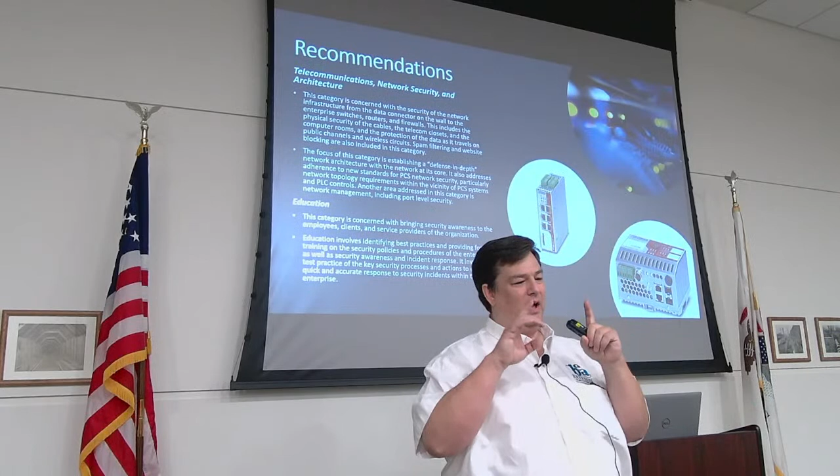That's why it's super important, because if the line was encrypted, okay, which by the way it's still not yet, I'm working with Brian on that. If the line was encrypted for the water plant, and it was done correctly, it doesn't matter that somebody down in City Hall had got malware, because the system can't get through, because you're firewalled and you're encrypted and everything. That's one of the reasons why.

Education, that's one of the reasons you're here. It's because you're going to get education on this stuff. Well, this is just overview stuff. So this is the kind of things that we try to educate you guys on, and this is why they bring people in to be able to educate on this stuff. Super important that we get it done.

Managing your cybersecurity. These are the top listings of the fields where people are trying to hack, because they know they have a very high incident of impact. If they get that system screwed up and messing around with, then they can impact a huge amount of people. Water and wastewater is on that list. We've heard of healthcare, it's almost common now that you're hearing about a hospital getting ransomware.

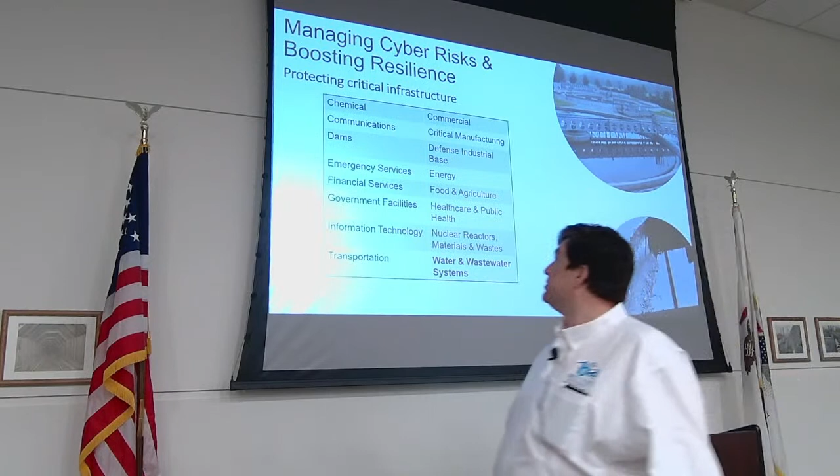Now, your chemicals, your dams, emergency services, your government facilities have all been hit by ransomware. You guys are on the list, because over the last decade, it's ramped up from a couple here and there to now it's a constant thing.

I have one customer that has somebody that keeps pinging their firewall from Korea, North Korea, not South Korea. It keeps being pinged by them, and they're looking for holes. I block them, they change their IP. I block them, they change their IP. But it happens over and over and over.

So how do we do this? Well, there's tools. You can do a cybersecurity risk and boosting resilience assessment, okay. Here's one from the Cybersecurity and Infrastructure Security Agency. What they have is a framework for improving critical infrastructure and cybersecurity. It's a voluntary risk assessment approach for managing your system. You address the broad security needs of those critical areas, but it's not one size fits all. Your system is going to be different from your system, and your system is going to be different from yours. So you tailor it for what you're doing, but you never cap yourself so that you can't expand and manage it and move as you need to.

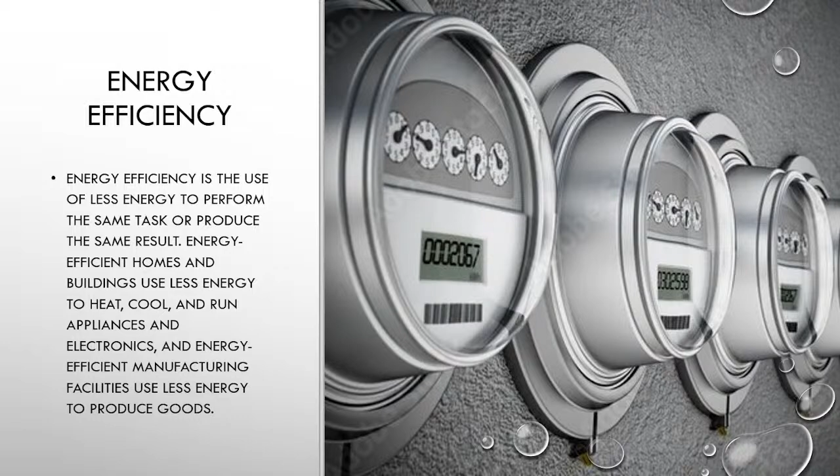Energy efficiency is pretty straightforward - trying to save money where we can on utility costs, which of course are going up. Is everybody here on Ameren? So everybody saw their bill. How many people actually see the bills for their facility? Anybody here actually see them? Okay, so you saw the spike.

Everybody at home saw their spike too. Just so you know, that was on the supply side - that wasn't really Ameren, they were just passing it along. Ameren just went to the ICC and applied for an 83 million dollar rate increase to go into effect in January. The ICC will rule on that, and Ameren will probably get a portion of it. So what I've been hearing is you can expect a similar increase in January.

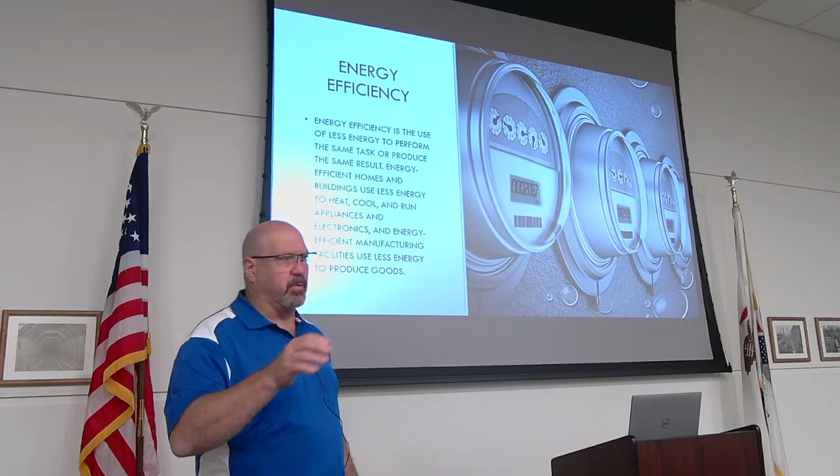So on your February bills, you're going to see another bump. There's no long-term scenario where it goes down, quite frankly. One of the things we're hearing is with the grid and MISO, which covers the Midwest, there are some issues as a lot of coal plants come offline - a lot of them were here, so getting generation from point A to point B wasn't as big an issue as it is now. Don't expect any of those things to turn around - you can expect rates to continue to increase.

Why do we do an assessment? It's pretty straightforward - we're going to try to figure out how to save money on utilities. Costs of everything are going up - chemicals, electricity, everything we do. We keep seeing huge increases.

So what we'll do is walk through your facility - have somebody come through with me and show me how you do this, what the controls are, what the pumping is. I take a lot of photos - my memory's not as good as it used to be. We can do some thermal imaging to try to find issues on occasion. I'll also try to get all your electrical information - that's 480 volt and 50 horse motor over here, and this stuff's all 240, that kind of thing.

I try to look up incentives - Ameren does have some incentive programs. They have a lot of rules with them, but they do have some pretty effective programs if you're willing to go down that road. And then, of course, we'll provide recommendations.

So I need at least one copy of your utility bill - we like to do it for a year. One place I worked with had given me a bill from February of last year, and when I did the assessment the other day, I said that's not going to work because your rates now are substantially different than they were then.

I also need a little bit of your time to walk around with me, so you can escort me and show me what's going on, let me get some data. And I need your knowledge of the conditions, because I'm not going to know anything about your plant. You'll walk me through your process - this VFD runs this motor, we run it 12 hours a day, and here's why, that kind of thing.

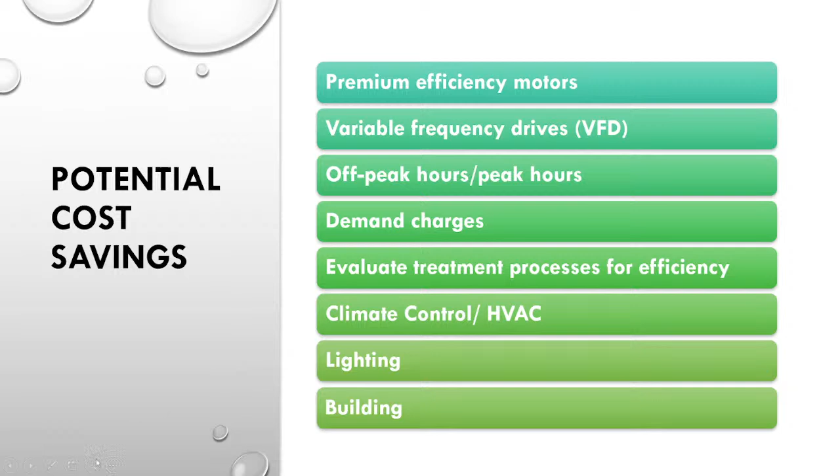EPA's got some estimates on how much power is generated just for it. Aeration and pumping, and wastewater aeration is a real big one for a lot of the smaller plants. Aeration and pumping both. Drinking water, by all means, pumps are the big thing. But bottom line, you're talking about a third of your operational costs just for energy.

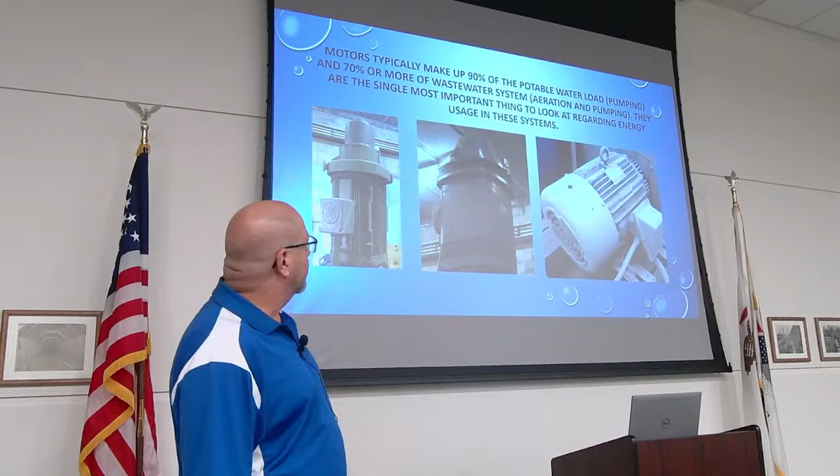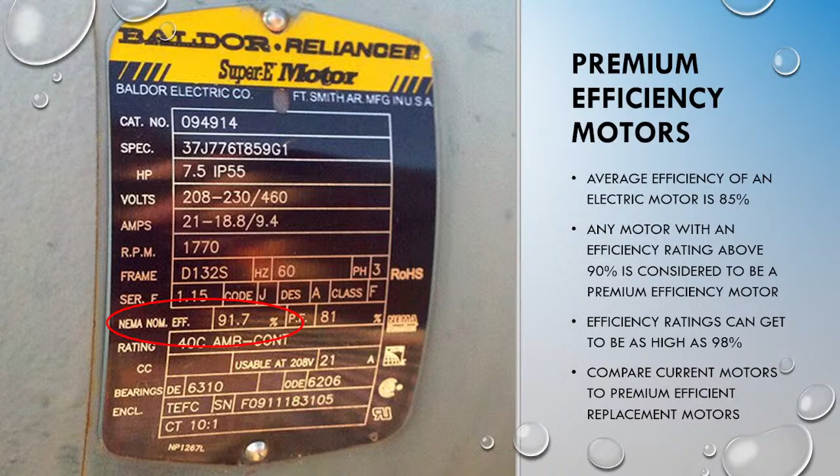When you're looking at pumping load, we're looking at motors, whether it's a 15 horse, 50 horse, 100 horse, no matter what, we're going to look at the efficiency on them. I've seen some motors that I think were older than I am, still there and still running, pretty impressive. Anyway, the average efficiency of an electric motor is 85. They are changing, and depending on the size of the motor, the premium efficiency is different. They can get as high as 98, but that's in bigger motors. You're not going to see that in a 7.5 or 15 horse motor.

As you can see, there's kind of what it is. So with smaller motors, the best you're going to get is like 91.7. But as you get up to 100 horse, you'll hit 95, and when you get bigger, you hit even higher efficiency. With electrical rates going up, it makes a significant difference.

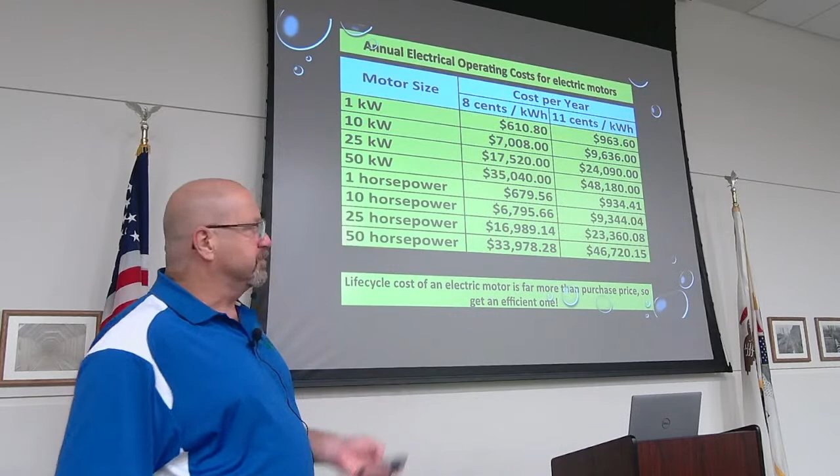This kind of shows you the rates going from 8 cents over to 11 cents. If you look at it like a 10 horse motor, you went from 6,800 to 9,300. This is 24/7, 365, so this motor's running all year long. But just running up really quick on one motor, that's the increase you saw.

A little bit here, a little bit there. This is all going to add up really fast when you start putting motor after motor.

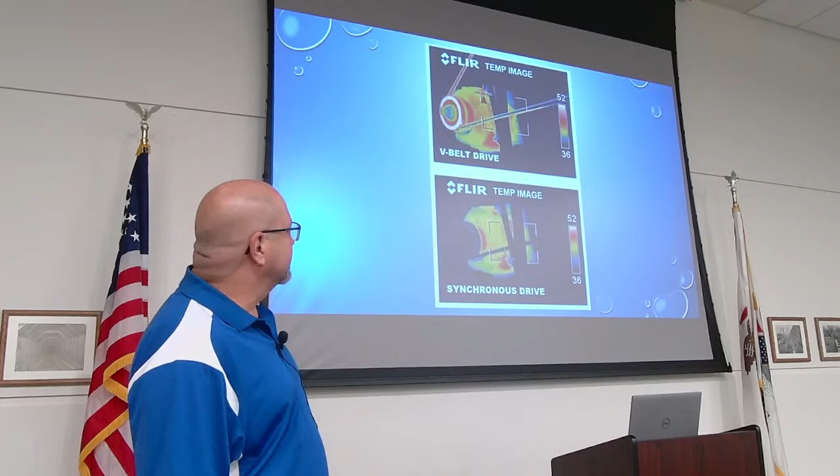We do use a FLIR once in a while on some stuff. This is one of the things that kind of surprised me - once again not my slide, I steal everything off the internet. This was just belt slippage. I wish they would have shot their range a little better, because that's obviously above 52. Basically it was pretty cold where it was at, and that belt was slipping, so they were just losing energy over the belt slip.

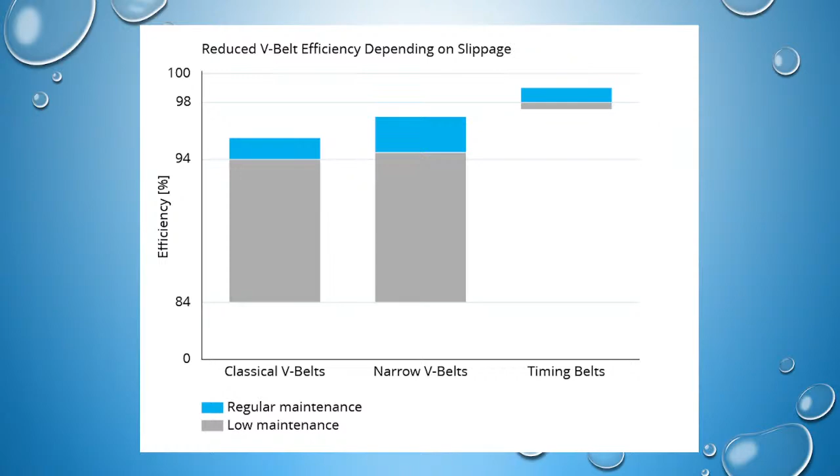Which doesn't sound like a lot, not a big deal, but one of the things they're pushing pretty hard now is timing belts - the cog belts, like a timing belt on a car. They slip a lot less. I never really liked the narrow V-belts, but apparently they're a little more efficient, I always went with the standard. But timing belts, I looked this up a couple places and they all pretty much said the same thing: if you're putting a belt drive on a blower or a compressor or something like that, go with timing belts and you'll save a couple percent efficiency. And if you've got something running 12 hours a day, you're going to make a little bit of money on it.

Once again, what we're looking at is trying to get everything we can from what we're spending. We don't want to waste electricity. I don't want 2 inches of head on my beer when I go get a draft, and I don't want to be wasting a bunch of money on electricity when I don't have to.

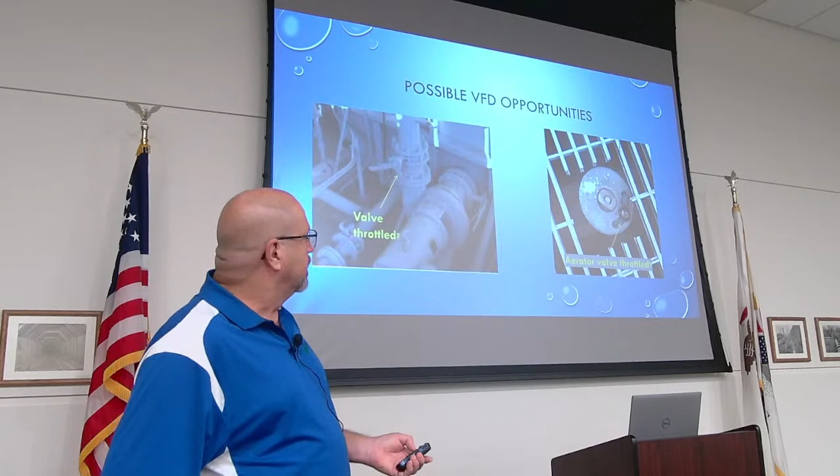I'm not sure if they can even turn it down enough if the shutoff head won't let it fall off the curve. I see a lot of aerators either throttled or on positive displacement, and they'll return some air, but once again you're just wasting it. If you could put a VFD on that and slow it down, you'd get the same result and save substantial money. I'll show you how much here in a little bit.

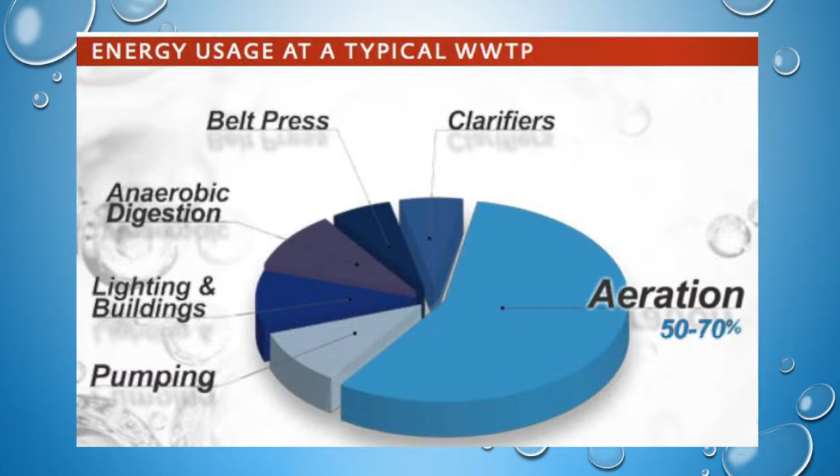Wastewater aeration's a big part of this, and of course every facility is a little bit different. If you've got to pump your water four times through your facility versus some of the small aeration plants we go to, where they pump it once, it gets to their system, pumps it up, and it goes through - for them aeration's obviously huge. So everything's a little bit different. You guys know your facility - I won't, you'll tell me about it, and you'll still know it ten times more than I ever will.

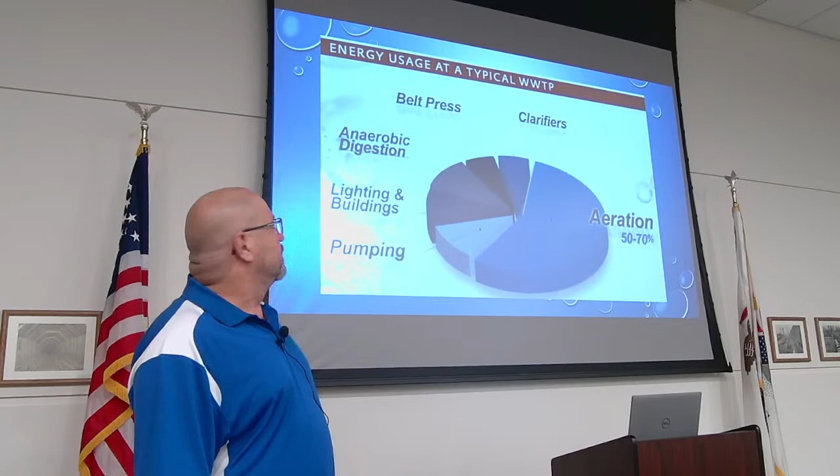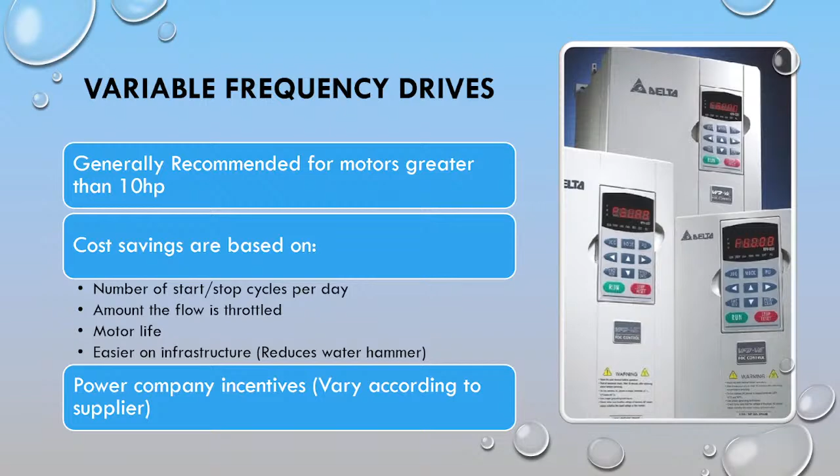VFDs are generally recommended for 10 horsepower, though you can get VFDs really small now. You actually see a lot of them on HVAC now, where instead of the blower stopping, it'll just ramp down, slow down, and then as the compressor kicks on, it'll pick back up, just to keep the air from getting hot and cold spots. They don't call them variable frequency drives in that case, they call them variable speed drives, but it's the same thing.

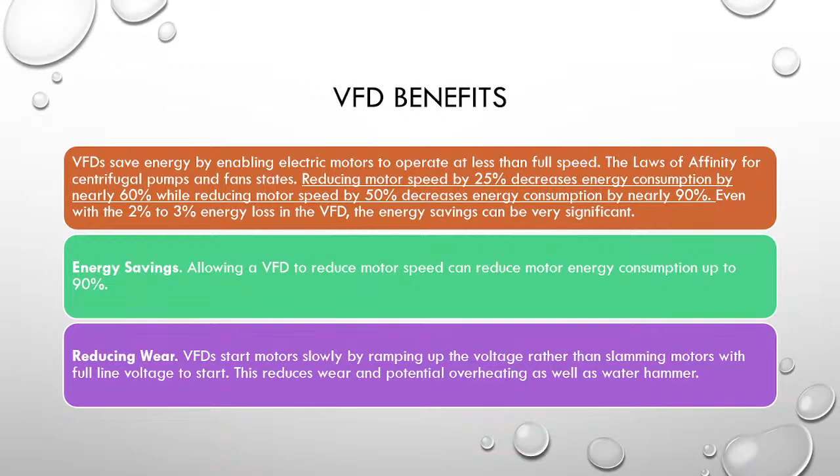We've got a little spreadsheet we kind of fill out for this, because it depends on how many times you start a day, how many hours you run a day, if you've got a valve throttled, and how far that valve's throttled - everything factors into it. The big thing is the Affinity law or Cube law, which is how they look at the energy savings. If you can cut it back by 25%, you're going to save half your energy on that. So if you've got a valve throttled wrong like the one we showed, they're going to cut their energy costs in half on that pump. If you've got a 50 horse motor running 12 to 24 hours a day with that valve throttled, you can cut half the cost, which is really substantial.

You can save up to 90%, but you're never really going to see that. If you're saving up to 90%, you probably have something that just needs to be resized. Anyway, VFDs are nice - they get rid of that whole start and stop, hammering, and so on.

Financial incentives are of course what we're really talking about with doing these. The demand charges - when you do the old cross-the-line start, the lights dim and everything, kind of take its time and come back up. That's where you hit your demand charges, depending on your utility and where you're at on those little blocks, because they have blocks they put you in. You could throw yourself up over that for a year, increasing that charge for a year when you may not need to. You could simply get around that by putting in a VFD or a soft start - in that case, depending on the condition, it may be better off for a soft start.

Oversizing - I'll tell you, one of the things I've seen oversized is on blowers. I've seen a lot of places where blowers are either redirecting air or they have them throttled, one of the two.

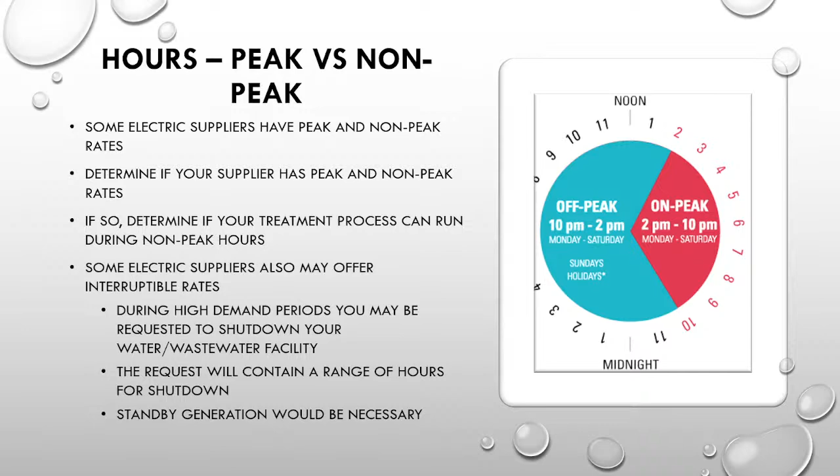I know we had one utility on an interruptible rate. Their utility could give them, I think, a 45-minute notice, and then they'd have to turn their power off and switch to generation. They'd have to be off for whatever period the utility determined, whether that was from 2 o'clock to 8 o'clock - they'd have to stay off the entire time. If they did, they got a greatly reduced energy rate, but if they came back on that line even 1 minute early, they not only negated that rate, they took their entire normal rate and increased it to a higher one. So it's something you can do, but you've got to have good generation and be careful with it - he said they'd always go like 5 minutes past just to make sure they didn't bust into that.

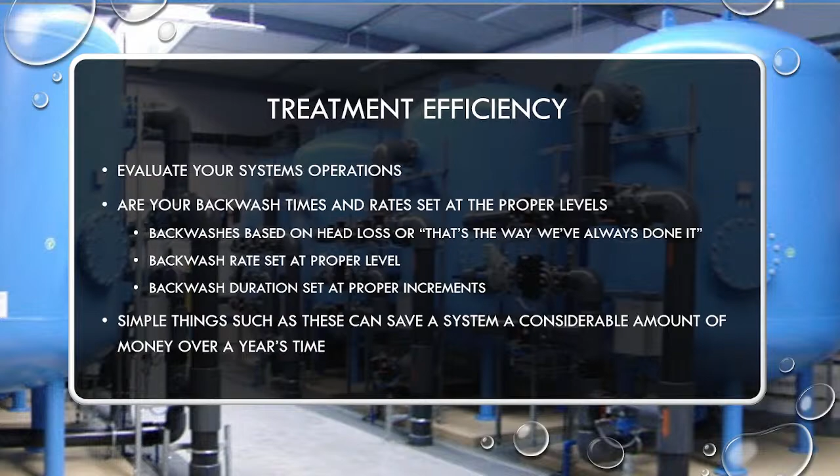Treatment efficiency. Mainly I really see this on the water side a lot with backwash. We backwash when we backwash because that's the way the guy that told me, and the guy before him told him. So we'll see some of that. But you do see that sometimes on aeration too. We got the aerator set here because that's where it's set. Not really why or how, it's just that's where the blowers are set at and that's where we leave them at.

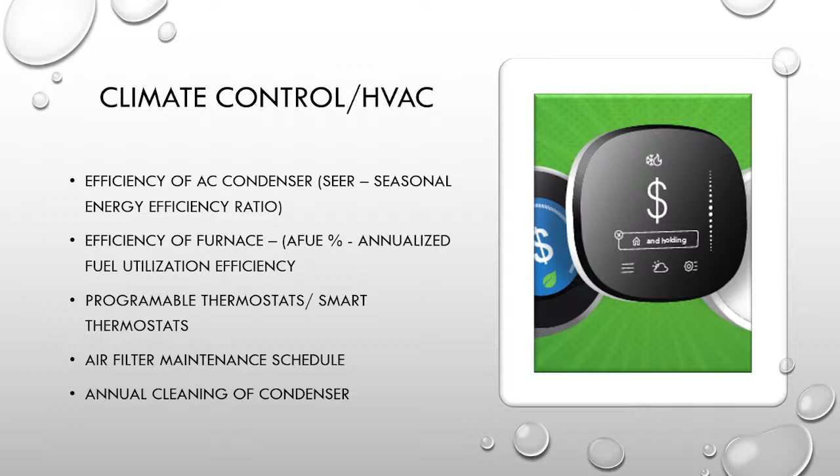Climate control, HVAC - this is stuff that, when you start getting into the buildings where you've got climate control, SEER units on the stuff and AFUEs on the furnaces and programmable thermostats, a lot of that stuff you can get.

Programmable thermostats - Ameren just had a program for them, I think that was it. It was like a $70 thermostat, and Ameren was rebating like 40 of it, and then they had another rebate for like another 30 of it. If you were an Ameren customer, you could basically get a programmable thermostat for $0 or $20 or whatever. So that's stuff that Ameren's kind of pushing on there.

The two big things you see on the HVAC is, you still go in and you got filters that look like that - that unit's just starving for air, can't do what it's trying to do. Or you'll go outside and the condenser's just plugged up. That thing's running 24 hours a day. Well, yeah, because it can't exchange the heat out of it.

So that's a real simple thing. I know it's not big in the whole scheme of things, it's not saving energy on a 100-horse motor, but if you've got 4 AC units set like this - the plant I was at, we had 6 of them.

We built it new, and we were about 18 months down the road, and all of a sudden we're like, has anybody ever cleaned them out? Actually, the HVAC guy came and asked how often do you clean them? And I said, oh yeah, well sure we are. Hell no, we hadn't done it for 18 months. We went in, sure enough, one of them looked like that. So it's something that's easy to forget, but it's something that if you want to save a little money, this is the way to do it. Because we all know when we save money, it goes right into our salaries.

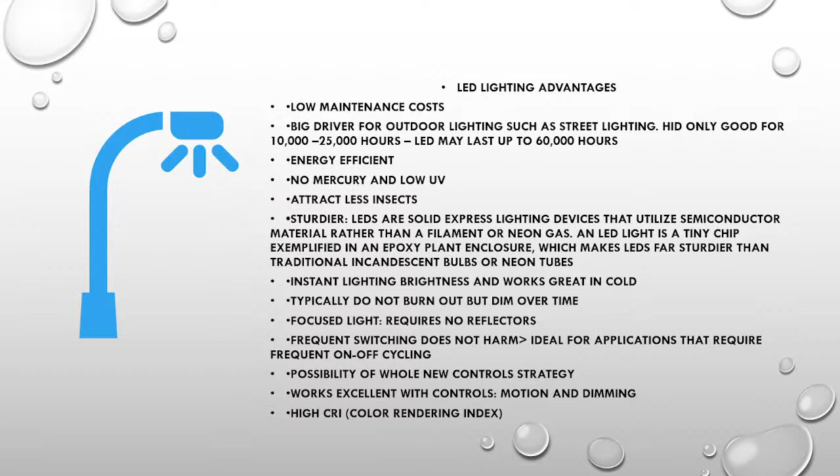Of course they last about 4 times longer than the incandescent bulb, and last longer than a fluorescent bulb. They will dim a little bit over time, and you'll have some of the little LEDs go out, but bottom line, you don't have to change them, you don't have to mess with them near as much. The two types you see a lot - well, you don't see a lot of the T12, but I still see a lot of 4-foot fluorescents.

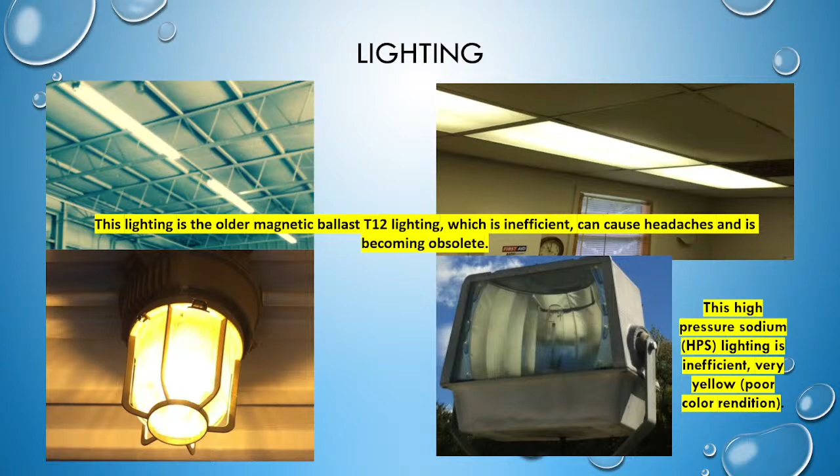If you go from that to an LED, you're seeing fairly substantial savings. If you've got high pressure sodium, those things are extremely inefficient, and you can make some pretty good savings on them. So everybody's like, I don't want to change fixtures, I don't want to have to do all that. You don't really have to.

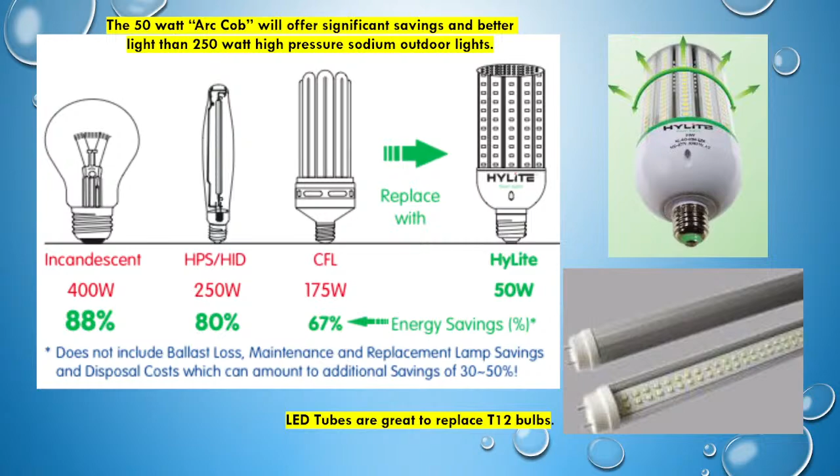You can just get LED bulbs for like the 4-foot fluorescents. You can take them out and gut them. Basically, pull the cover off, turn the power off, bypass your ballast, just wire past your ballast, and you can get these little LED bulbs. LEDs won't work on AC, they work on DC, but they've got a little module in there. So you just put them right in your same fixtures, put your fixture backs together, and you've got LED bulbs.

Now, are the ones you're putting in here as good as some of the high-end ones? Probably not, but this is a really quick change out. You can get these boxes of 50 off of eBay really cheap. It's a quick change out in areas where you're not worried about how the fixture looks. You're not worried like in here, where you want everything to look nice. You're out in the shop, or out in the house, one of your pump buildings or something.

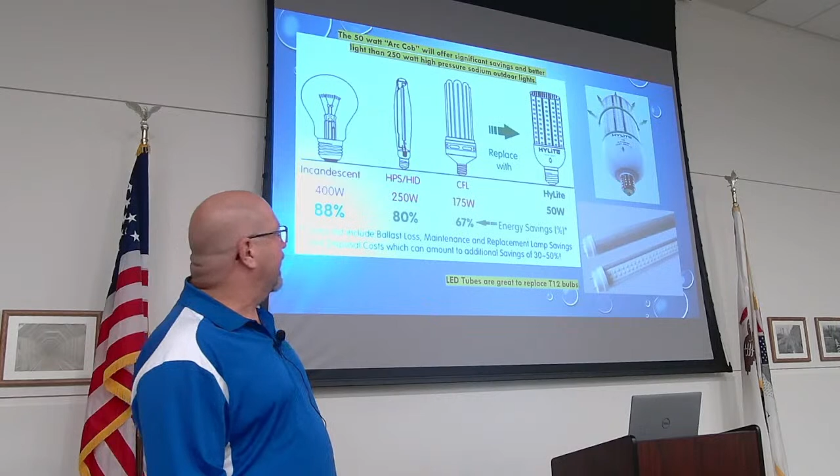Same way, if you've got some old areas with can lights or something, you've got these arc cobs, or corn cobs as they get called. They thread right into an incandescent fixture. They've got it to where 3 sides of them tilt out and you can direct them. You'll see a lot of them in garages and stuff. So it's pretty easy to go with LEDs if you really want to, without doing a ton of work.

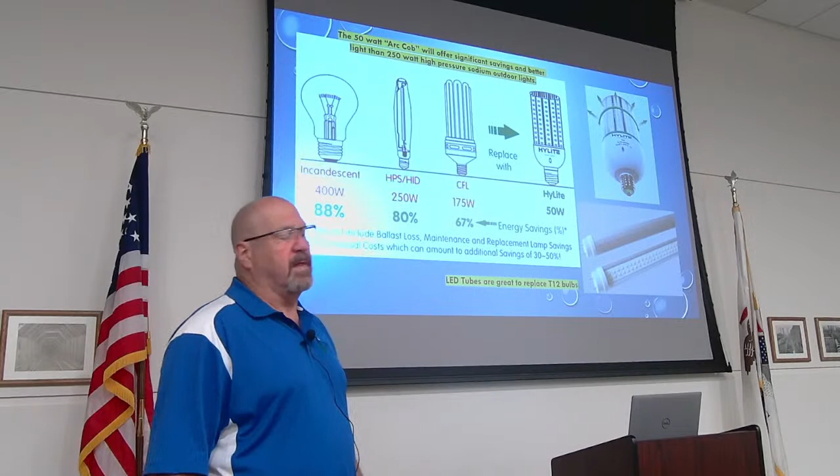Ameren, you can buy them off of Ameren. They've got them there where they've got to replace the T12s and the LED corn cobs, so you can see their price. Ameren's got that, that's Ameren Illinois. They've got a bunch of stuff on their website where you can go ahead and get to.

We'll look at your buildings while we're there, if there's something you want us to do or not. Are your windows leaking a bunch of air? Insulation, heating, are we cooling areas or heating areas that don't really need to be? And then of course, cracks in the structures.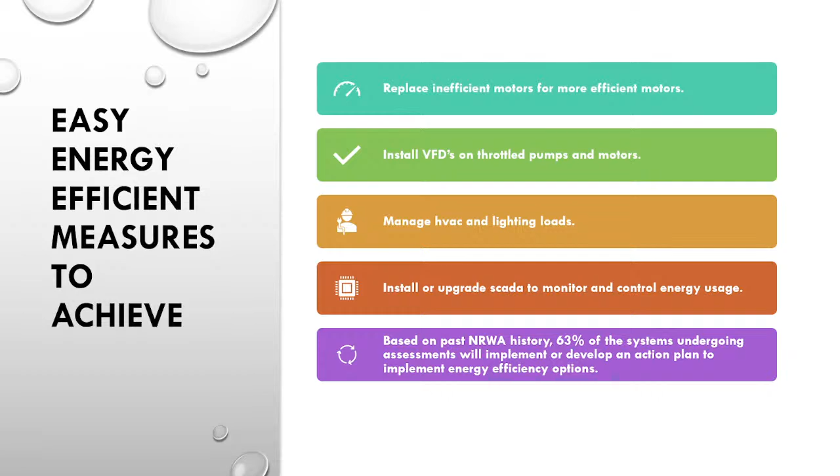If you're just worried about the start and stop, put a soft start on it. Now if you're wanting control where you can set it, then you need to go with the VFD, and if you can set it down a little bit, you will save some money. But if you're just worried about that spike off the start, you want a nice slow start and slow stop, you're better off just putting a soft start on it because it'll be more energy efficient.

We'll look at HVAC, look at your SCADA. You've got SCADA that's controlling stuff that maybe it doesn't need to be doing a certain way. The National Rural Water says that 63% of systems will implement some plan.

Of course, where to get the money to do all this stuff is kind of the big hinge point for everything. USDA's got some loans and grants. There's probably more money out there for infrastructure right now than there's ever been. I've been into it for 38 years, and there's just tons of government funding to come in and do some stuff. Principal forgiveness, USDA's got some loans for rural stuff.

Ameren Illinois has got some incentives where they do this. This is from a reply to an email I sent them, saying, hey, I just want to make sure this is a municipal customer, DS2 is the billing rate, and this was from their email. Municipal buildings, basically anything with DS2, DS3. So municipalities do fit into their structures for that.

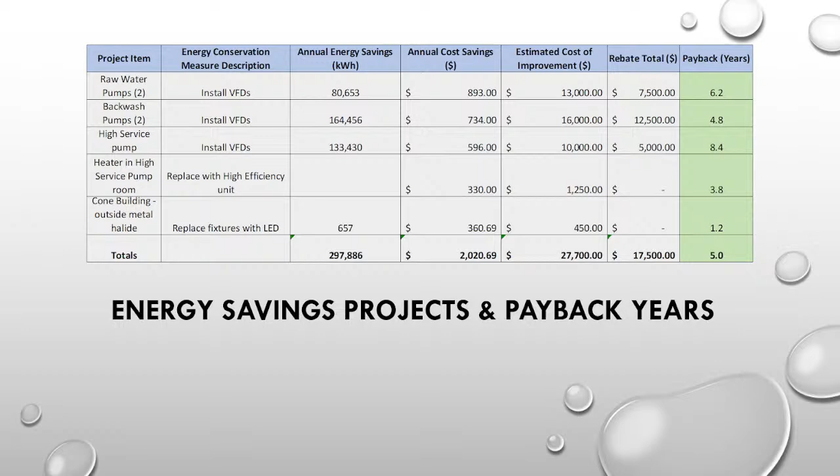And then it shows how you're going to get paid back in years. So that's where you can say, you know what, we're going to change these lights out right here, get them done, and get that return coming back in. And maybe then we're going to change this heater out, maybe do a backwash. So you can do any of it, none of it, it's strictly up to you. None of my business until I come back a couple years later and ask how's it going, what'd you do. And even then you can tell me we didn't do any of it, we disagree, that's up to you. But I do follow-ups because that's part of my thing.

So, of course, the energy pyramid - energy conservation is where we all start. Turn the lights off when we're not using them, that kind of stuff. And then that's where I come in, trying to figure out that stuff. And then, of course, you can get into renewable energy. I've had a couple slides for that just because I've had quite a bit of questions on it.

There are some companies that are focused on wastewater plants and doing installations. There's one company doing solar panels on lagoons where they actually float. I'm not sure if that'd be a route I'd want to go, but there are companies that do focus on putting panels and systems in at wastewater plants. I typically don't get as much opposition there - wastewater plants tend to sit out there, nobody lives right around them. So when they put them up, people don't go, hey, I don't want that next to me. They said it's a little easier for them to do that, and they know there's some demand there with blowers and pumps, so that demand makes the sizing.

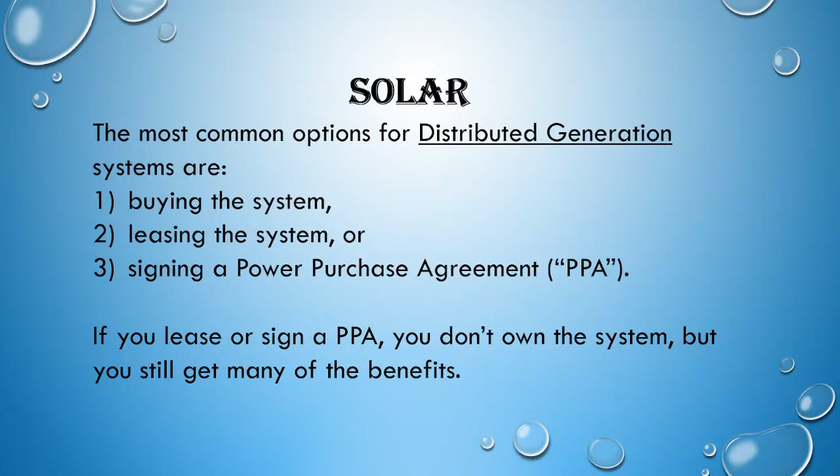So we're going to talk just briefly about distributed generation systems. This is not community solar or any of those programs - this is strictly where you're going to put panels at your facility, that's what this is geared for. You've basically got three options. You can buy a system and have it installed - it's your system, you get every bit of benefit from it, but you have to pay for it. You can lease a system, which is exactly what it sounds like, they come in and put it in and you lease it from them. Or you could do power purchase agreements, which is what we're seeing quite a bit of.

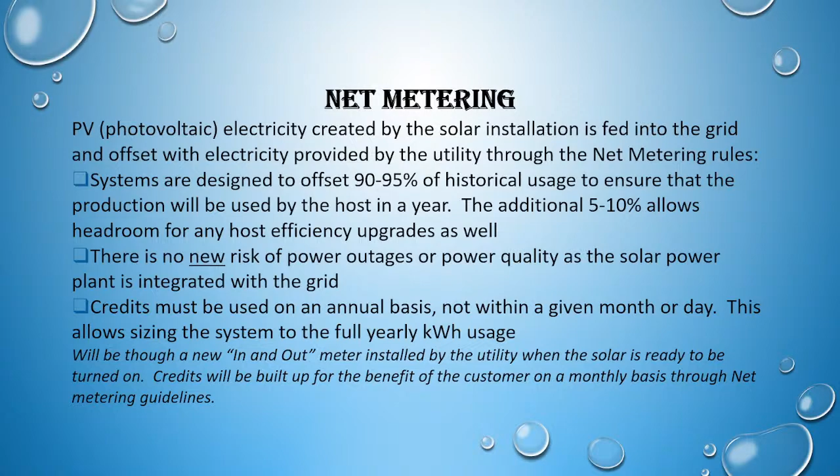What we're talking about is net metering. So basically, the generation from it's going to be tied in with a different type of meter where they can monitor both directions of it. They won't size it for 100%, it'll be sized a little bit smaller than your demand. And then they run the credits over the year. So if you have a month like this where you've got a lot of sunlight, you generate more than you use, you get credit for that and you can use it back up - it runs on a year basis. So it's not like you're only going to get a benefit in the summertime.

So this is what they're going to want: utility bills, and then they'll look at your area. If you've got a place that floods 8 inches a foot deep every so often, they don't care about that. They'll put solar panels there because they're setting up on a rack like this, so they don't really care. There are some areas you might not want to use for anything else - that might be a place for them.

Of course, there's setbacks and local regulations. If your area says we don't allow solar panels, that might be it. And of course, you can't have an area that's really shaded or anything. So they'll size it accordingly.

They'll look at utility rates in the area to see what their return is. You've got to remember, they're looking to make money too, and they don't want really big ones for this - they're looking at kind of mid-size. And they're getting tax incentives to do this; it's one of the places they're making money.

So when they first come in, they're going to want you to sign a letter of intent, which just says we're going to talk to you. The solar company's going to spend a little money - they'll get some engineers, look at the aerial, come out and check your property, look at the grid, and talk about where it comes in. So they're going to spend a little bit of money.

So what that agreement says is you won't talk to any other solar provider for 6 months, whether you go with them or not. You can't talk to anybody else. If you do, they can come at you and say, hey, we spent $4,500 in engineering, we want our money back. So it's not a huge deal, but just know once you sign that, don't be talking to anybody else, because you open yourself up a little bit.

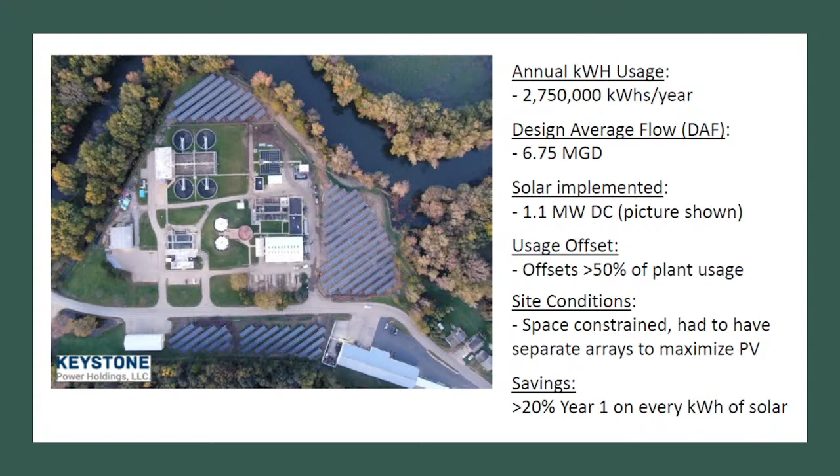So I use this picture because you can see it doesn't have to be in one spot - they did some here, over here, and then they just interconnect them all. Every company's a little bit different in how they do it. There's another firm that's putting solar panels on the back of the arrays because they're seeing enough reflection coming off the front and off the ground that they're capturing that with panels on the back. So instead of having panels only facing the sun, they're putting panels on the back so they capture more in the same area.

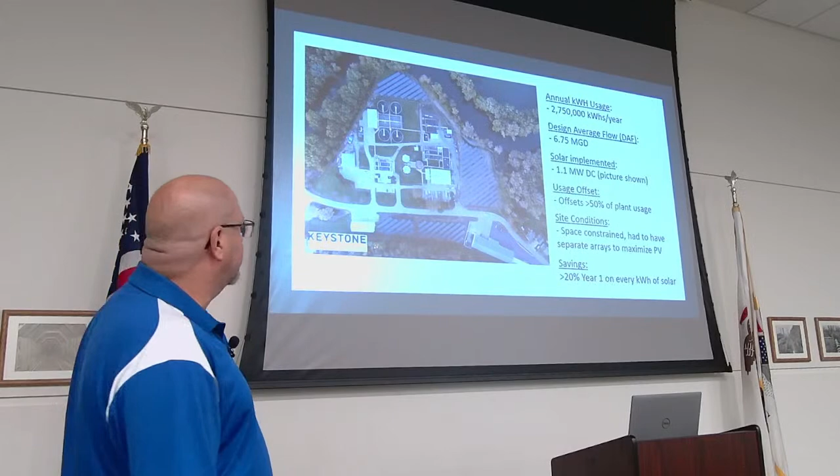They're also one of the companies whose panels seem to be a little bit more flexible, so supposedly a little more durable - we'll see. Of course, lifetimes of the panels - as of right now they say 30 years, but at the end of 30 years they typically don't just stop working. They just kind of degrade like a lot of other stuff.

So what you're going to look at is: here's what we're making, you're locked in for 30 years, and you've got the contract with them.

You're probably at the end of 30 years, they're probably still going to be generating electricity, probably not like they were at the start of the program, but same way, probably not like they're going to be down to 10%. So then you have options at that point. You can say, hey, get your stuff off my property, we decide we're going to build some more lagoons there, move them out. Or you can say, hey, we're still getting a benefit from them, let's go to another 10-year agreement.

Or you could buy the system out. You could say, well, what does it take to buy it? Because it's going to cost them money to pick it up and move it, obviously. So you could say, hey, you know what, we like it, we'll keep the benefit ourselves, but we want all the benefit. At that point, you'd evaluate: the last 10 years, have they been here every month? I doubt I'd want that system, I wouldn't want to be trying to maintain something. But if they haven't been here very much, system's running good, hadn't had any issues, maybe at that time you want to buy it out and say, hey, we'll take it over. I'm not sure, so it'll be up to you.

And pretty much in a nutshell, that's all I got, unless anybody's got questions.

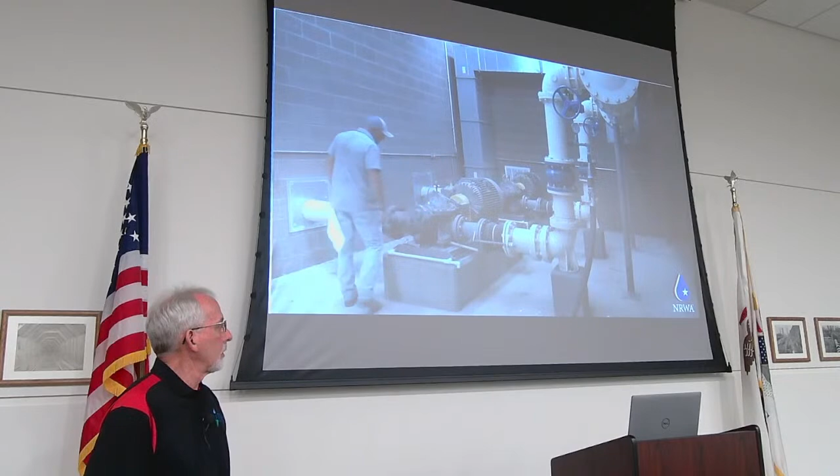If I was needing to hire someone, I would look at someone that had apprenticeship training before I looked at anyone else, because they would have the deeper understanding of the water business or wastewater business, either one. They have the well-rounded knowledge that puts them above everyone else.

You know, I think I'm making an impact through water. The training that I've been through, I know I'm doing things the right way, up to regulation, and just providing safe drinking water. My favorite part of my whole job is the fact that I'm needed.

I feel like I've got worth in this career. If you're looking for a job, don't even consider it, but if you're looking for a career, really do consider water. It's something you look forward to going to and doing every day, knowing that you're making a difference.

I know most of the guys in the room are not unlike myself, and this doesn't necessarily apply to you, but thinking toward the future, our replacements and future planning, this is definitely a good program to get those people involved in. So, to get into some of the details of the apprenticeship program.

The first apprentice group started in September 2021. There's currently 3 groups, 2 water and 1 wastewater. We actually only, at this time, have 2 wastewater apprentices, and they're over at Tilton, Illinois, near Danville.